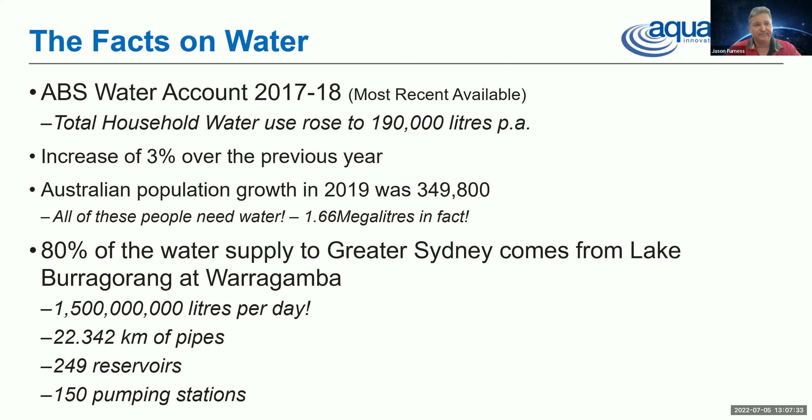So getting into it for the time frame, we've always got to look at how we can do more with less, and you're always looking to make innovation into your design work. Developers are looking for innovation to have something that makes the development stand out and, realistically, reduce the cost. I know a lot of us are struggling with the inflationary impact of building costs, causing designs to alter, projects to go on hold, or projects to frankly be cancelled because of the increases. So wherever we can have a solution that helps create some flexibility and reduces cost, that's great. Lifting the bar and all that is what we're all looking through.

They're people we deal with regularly in many cases using Aquacomb. It's a well-proven system. So I'm going to take you through rainwater and why you have to do things about it, some major technology options currently used, a bit about council's approaches, and key questions for you to look at and consider and ask the people you partner with in developing your designs.

And just one example of a very tricky site we're engaged in, where we've been rung up as an emergency to try and help rescue this project. Okay, Aquacomb — it's the graphic. Rain falls, look outside, you'll see it.

The rain is captured in the downpipes. It goes into tanks that are all interconnected, and they have the same footprint as your standard polystyrene waffle pod. That's where we capture it.

Now, whether you've got 1,000, 3,000, or 20,000 litres, depending on the size of the house, what's visible above the ground is the small pump station. I'll show you what that looks like a bit later on. But basically, you end up reusing your existing footprint.

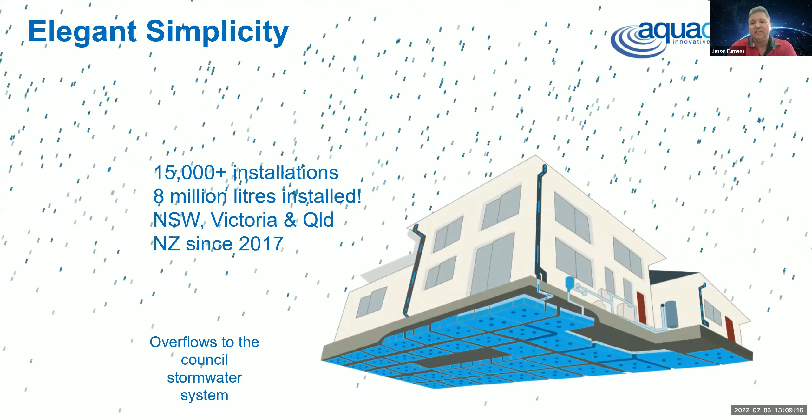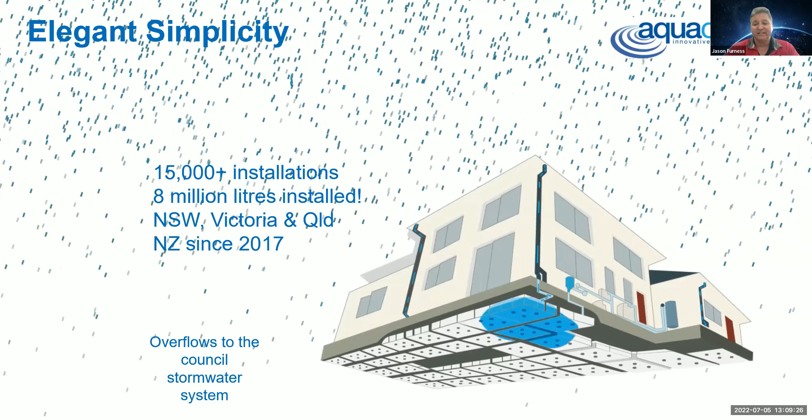So if you've got a very small site where land use ratio is an issue, it's a very good solution. If you've got a tricky site where access is a problem for an existing site, it's also a very good solution.

Okay, why do you have to do anything? All that pipe work I mentioned before has got to be maintained. Governments have a big infrastructure bill, they want to reduce that, and they're trying to take load off the system. That's what it's all about.

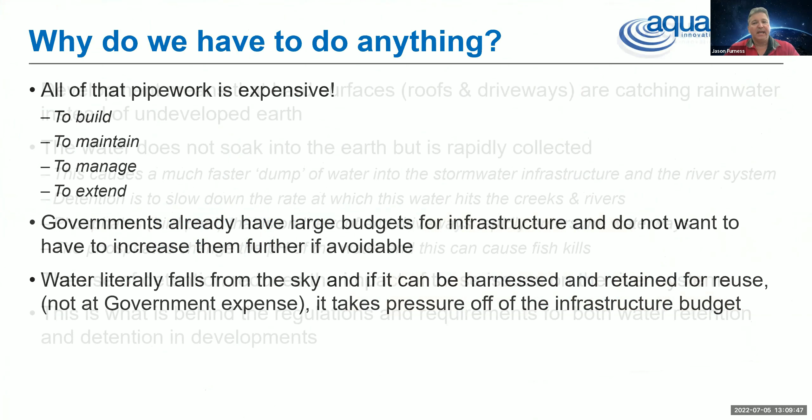As we increase the amount of development, hard surfaces, roofs and driveways catch water and it runs off faster instead of going into the ground. The water doesn't soak into the earth, it's caught, and it's got to go somewhere quickly. That's what most of you will be familiar with - detention basins around various subdivisions.

And increasingly, particularly if you're in a council area where there are waterways, the regulations they have are well above BASIX, and you can get your DA back with stricter requirements.

There's one we're looking at from Manly where there's a small block. It had been knocked down and rebuilt into duplexes. The DA came back, and that's great, but each duplex had to have 3,000 litres of retention. Okay, that's all right. But 15,000 litres of detention each - that's massive, and that project is not viable with underground solutions.

You're going to add 100 grand to the construction costs. That detention is there to take the load off the system for the shock of volume of water coming through, but also, frankly, the bird poo changing the chemical balance of the streams and estuaries. That's why there are regulations governing this.

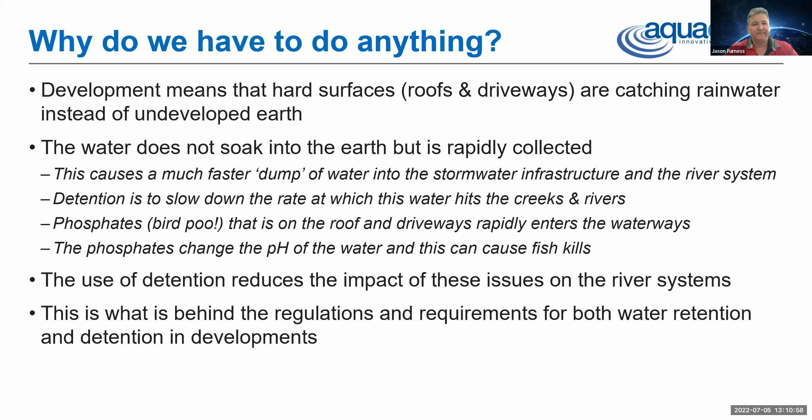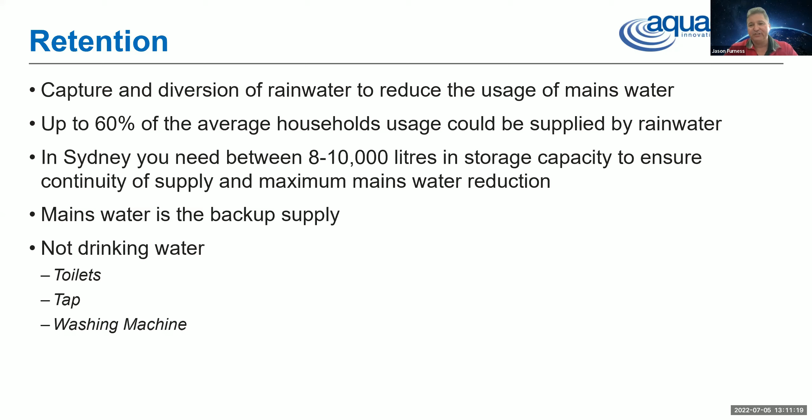Right, the main two water strategies: retention, capture and reuse. You need about 8 to 10,000 litres in Sydney to really guarantee your percentage, or to always have water around between dry periods. I know for those of us in that area that doesn't really seem too real to us right now, but it will come back. Toilets, taps, washing machine, and an external tap is what we can do with it.

Detention. This is taking the shock load off the estuaries, and it needs much larger volumes. The smallest one I've seen specified was 10,000 litres. Stormwater surge is captured and then drains away over a period of time.

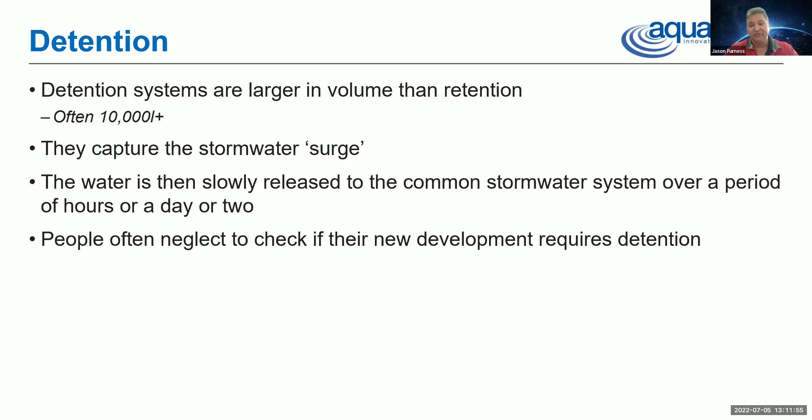This is a mistake I've seen people make - they don't go and check whether they have to put detention in. And when it comes back with the approved DA with conditions on there, we get a phone call saying, we don't want to dig a big hole for an underground tank, or we hadn't budgeted on this - what can we do?

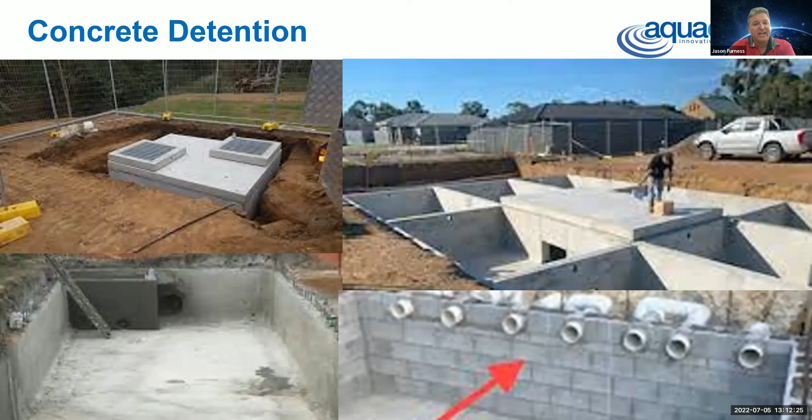Right, well-known and accepted technologies and what's going on with them. So concrete detention pits are really common - built on site, some precast and put in. It's expensive, you've got to dig a big hole, and you usually have to treat or compact the earth beneath it. If you build one like the bottom right-hand corner, you've then got to seal it. And they are unsightly and expensive, and block up site access during construction unless it's carefully coordinated. It's a well-proven technology - it works.

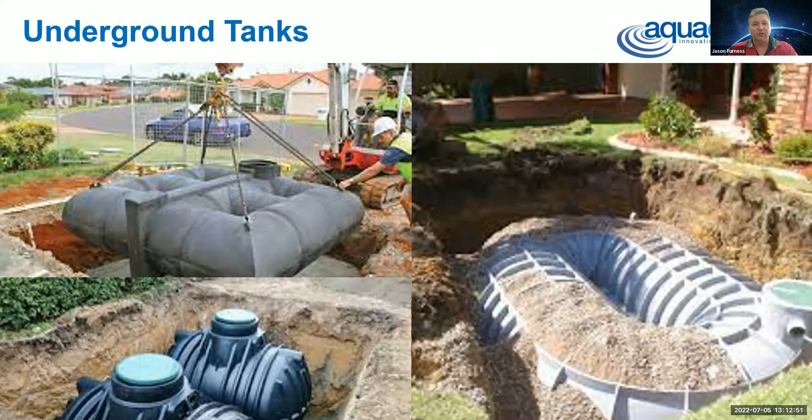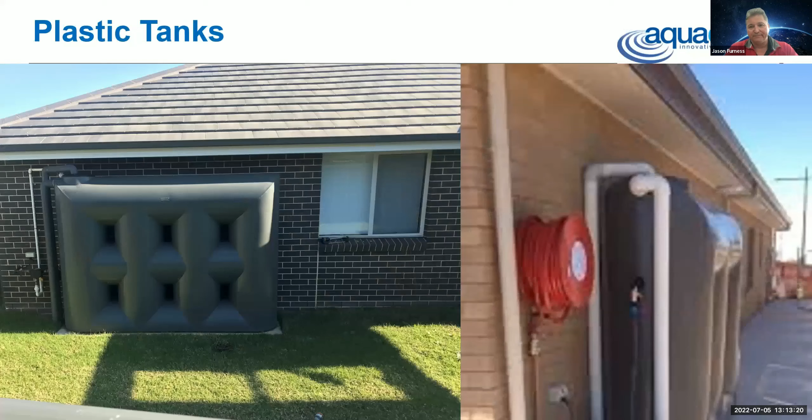Now, above ground tanks are only allowed in most areas for retention, and not allowed for detention. I think one of the reasons for that is that anyone can come through after the event, remove the above ground tank, and no one's the wiser. Then the council loses all its protection of its assets.

Now, we supply a range of above ground tanks. If anyone wants above ground tanks, that's fine - they are very functional. They're just very rarely allowed for detention from the councils we deal with a lot, and the engineers we work with.

For built-in ground tanks, you end up with a bigger area covered because you usually lose that space above it. It's not a lawn or a usable area. It can be part of a driveway or an access way amongst townhouses, but you end up with a big area being taken up. And plastic and metal above-ground tanks, you're losing the area for detention or retention.

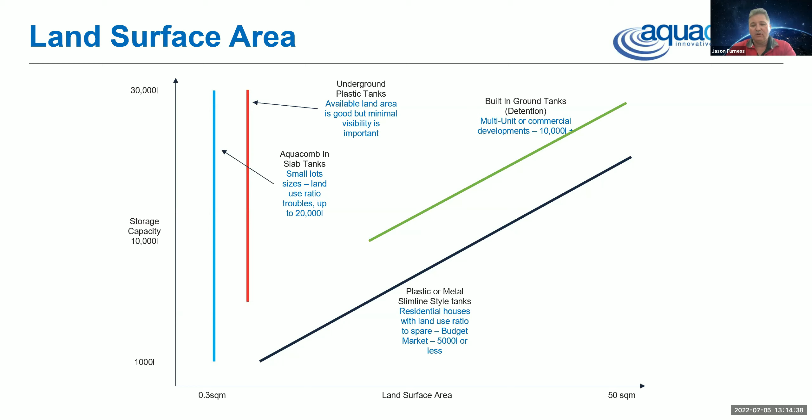Cost. If you're going to do a big underground tank, that's the most expensive relatively - this is all subject to change with prices of various commodities. The cheapest all the way is above-ground plastic tanks, but they're not always allowed for some solutions. Aquacomb is more expensive than other areas, but digging a big hole and all that excavation work and the time is very, very pricey.

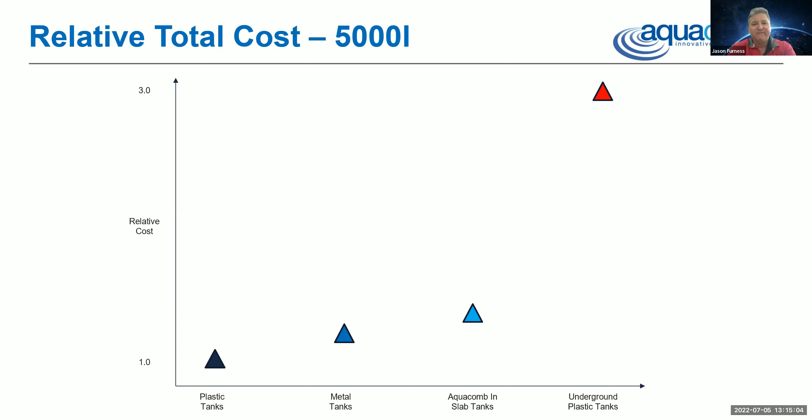That's a fairly common basic size for retention. It's 3 odd metres long, a bit over 2 metres high, and this one's about 1080, so a bit over a metre deep. If you've got a smaller or medium-sized block, it's taking up a lot of side access.

And the big thing is you may as well write off a window against the side of the house. You've got a home theatre, great, you don't want a window on that wall. If you put it in as an afterthought, you will block a window if you've got one there. You'll also block off your side access, but get some idea of the scale.

Now, if you're looking at a 5,000 litre underground tank - again I'm there for scale purposes - 3.5 metres by 3.5 metres. You've got to dig down about... the tank itself is about 800 deep, but you've usually got to go down about 1.2 or more to give you some ground coverage, and that's what I've got my hand on there, the outlet up to the hatch.

These are big items of kit that need to be planned in, and that tank weighs 400 kilos - there's a bit of effort involved in putting that in place. Aquacomb units, they're 13 or 15 kilos each, depending on the size, and you've got the pump box there.

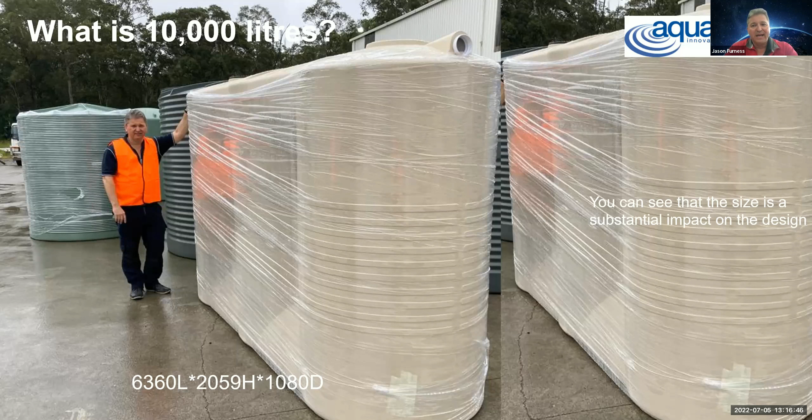Now skipping through, I know we're short of time - 10,000 litres, it's the magic of cut and paste. Again, you've got over 6 metres in length. If you have a large retention requirement, it becomes unviable - you start looking like an industrial chemical plant on the exterior if you've got to put those things on the side of your house.

So, questions to ask to avoid the problems we get. Every weekend we get responses to our ads about the keyword of detention saying, can you help us, we've got a detention problem. Go and ask first - look at your local DCP, LEPs, or whatever the various acronyms your council is using about the plan. It's easy to overlook that there will be a detention requirement.

We get plenty of builders, developers, and homeowners talking to us a couple of weeks out saying, I've got my DA, but this requirement on here we can't solve without boosting our cost up, what do we do, we'd like to start construction in 6 weeks' time. By the end of August we will have that pathway through councils all mapped out with our first few jobs going through - this is a relatively new venture, and we've got the right engineers involved helping us pick through, dot the I's, cross the T's.

It's all going to be there, and we've got a couple of councils in Sydney that are very cooperative for doing this. This is a problem you can avoid, the sticker shock and the tired and emotional response, because for all of us involved in designing and constructing, it's pretty hard to look the homeowner in the eye and say, oops, sorry, we didn't think of that one. You can go and have a look.

BASIX minimum, ask council what's the history about going above BASIX minimums for retention in particular. Some BASIX minimum will be 3,000, some will still specify 5 or more. Our experience is if the council's covering significant waterways or coastal areas, they seem to be the ones much more likely to increase those requirements above the BASIX minimum.

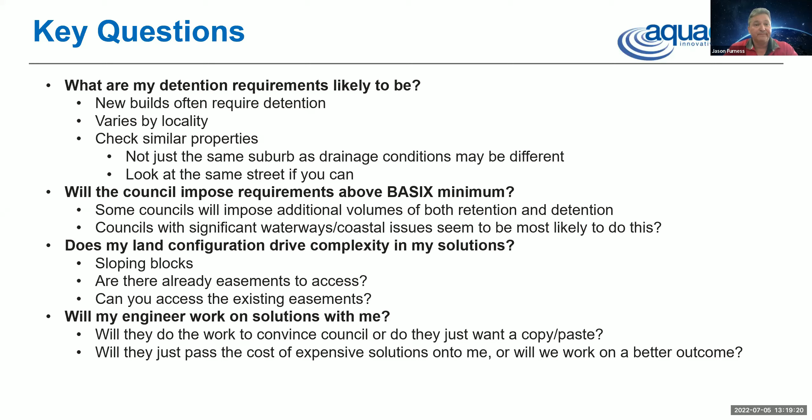Tricky site. This is a beautiful renovation extension happening on the northern beaches. Great example - we've got the DA, it's all beautifully done, the designs are there, I just copied and pasted a bit out of the architectural plans. However, they've got to put in about 25,000 litres of on-site detention, and the front part, the upper stories of that house, are already there. You cannot reach over the back to put a big tank in. They've got bad access all the way around, and the cost is going to - well, they haven't got access.

It doesn't matter what it's going to cost. You can't get a crane to get any asset over there, and you have to hand carry every brick if you're going to construct it all by hand. And they're being told they have to capture all the water from all roof surfaces, including the surrounds of the pool. They can attach to an easement at the base of that property.

This is one of those Hail Mary passes we had given our way. I'll have a look at the Q&A in a minute - I can't deal with that right now, I can't look at it and see what I'm talking about.

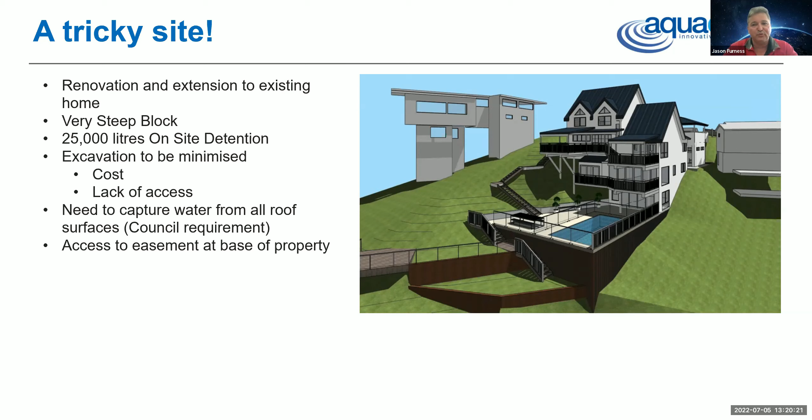All right, so we've got a very complex system here with aquacomb pods all interconnecting from the high areas to the low, but it's all very simple, it's just a lot of it. Go back - now, we can solve all of that.

We can deal with the access, we can comply with all the requirements. All we need to do is cooperate with the council and the hydraulic engineers to show that we attach to the easements, we've looked at all the alternatives, and we're there. And then this very prestigious looking and rather expensive renovation can go ahead. If we can't help them with the solution, then that homeowner's wasted a stack of money on something that could have been flushed out before we began.

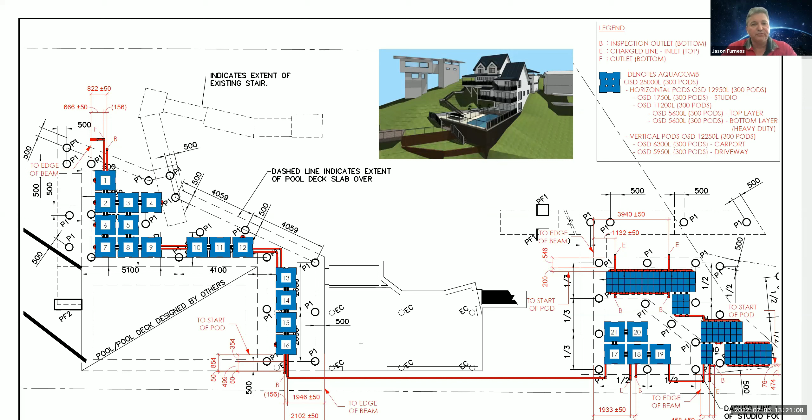I know we're short of time, it's only a 15-minute activity, so I'll just go through that and have a quick look at the Q&A, see if I can answer anything there.

Okay, try to use your system - a stormwater engineer was completely against it, the reason was cost and maintenance, he convinced the clients not to use it. Find a different stormwater engineer, there's plenty to do with it. We've got 15,000 of these things in here, used by other builders. We have a way of cleaning the system, and it is more expensive than a standard above ground tank. Not every engineer - I am an engineer myself, so I can pay out on my own profession - but not every engineer agrees with everything, and we're approved and utilised quite widely.

Okay, the question about energy efficiency - we do get asked about this a little bit, and there's nothing that we have that allows us to model any impact on the thermal performance of the slab or the thermal performance of the activity there.

There isn't work that we've done around that. We don't have problems with people saying there's cold floors. I'm certain in a thermodynamic sense it does have some impact when the tanks are full. We think what's going to happen is the water temperature will equalise with the ground temperature, which is quite low, but we don't have the modelling around any of that.

Concrete underground tanks are generally much, much more expensive - I think at a factor of 3 in the graph I prepared for a presentation to a building designers group. As for lifespan, we warrant the Aquacomb tanks for the life of the slab. So unless your slab's cracked and falling apart, the tanks are going to be fine. They are very well protected.

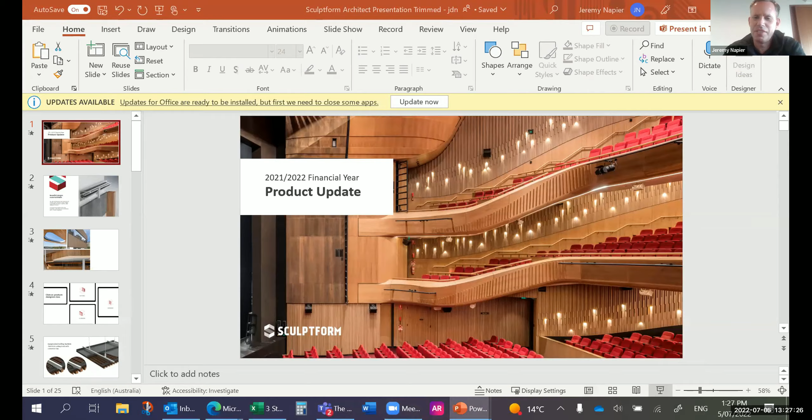I'll hand over to you. You just need to change that into presentation mode, because we can see the thumbnails down the side. Sorry about that. I don't do this very often. All good, thank you, that's it.

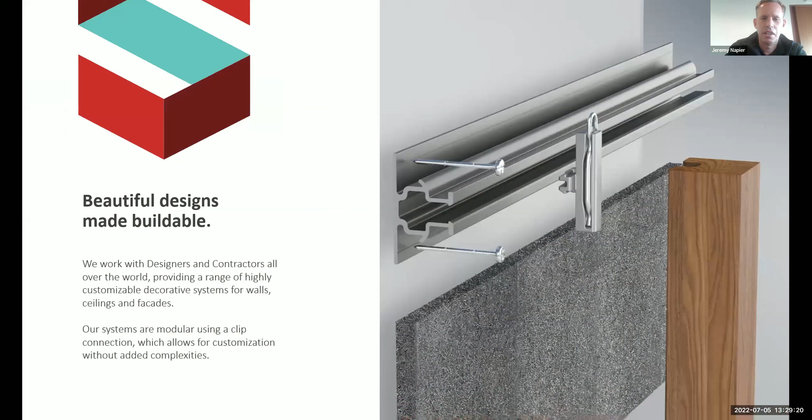So what makes us who we are? It's really the connection. We are strong believers in modular, and in Lego, and the idea that with one Lego block you can create anything really. It's about the fact that you can achieve something that is pretty much custom or bespoke, but it's made out of standard elements that are modular and can be configured in any number of different ways.

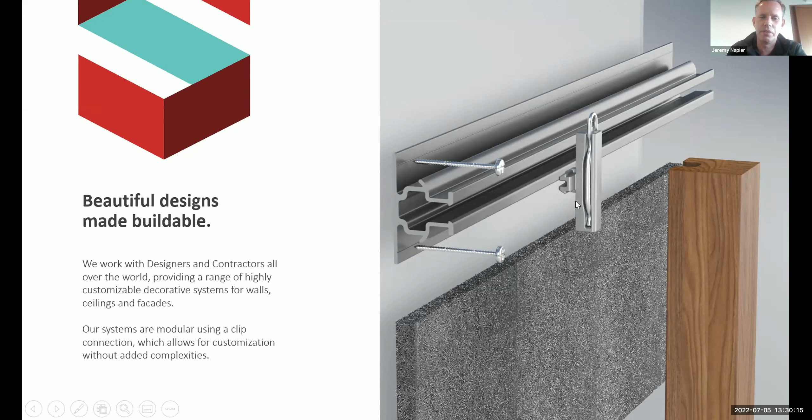The genius of our product is really in the clip, or in that connection. It is literally a click-on button onto the track. The tracks come with these fixing clips pre-mounted at the fixing centers, or the pitch that you specify. Then you get packs of tracks and you get the battens, the pre-finished battens, and you just screw up the tracks and you click on the battens.

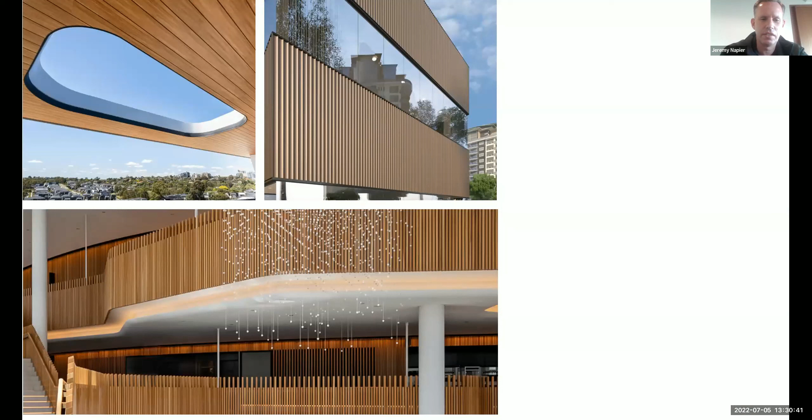That is our sort of main product, our click-on battens product. And you can see further than that, we are going into other products which are based on the same platform.

So we have a click-on cladding system on these two top images. Top left one was a Mirvac project, a great big feature on a multi-unit residential project. And the right-hand one is obviously an external facade with a fluted profile.

We've also started a clip system which can be used for balustrades, balustrade infills, which many would know is a really tough application engineering-wise.

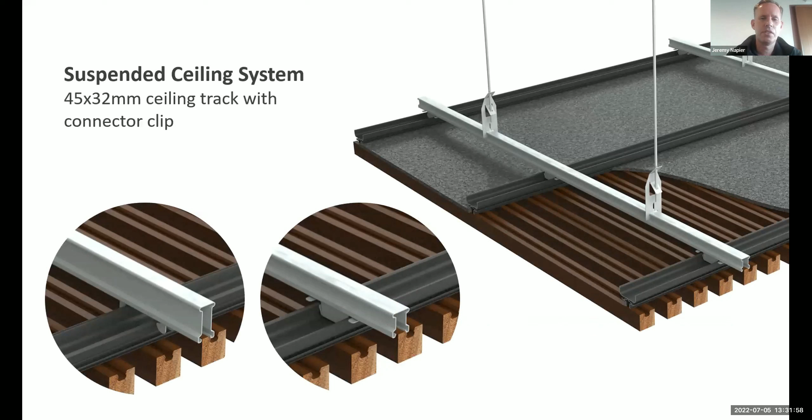In terms of just going to ceilings, a lot of what we do is interior ceilings, which obviously are for feature applications, but then also where there are acoustic requirements. Our product does perform excellently acoustically, being used in convention centres, theatres, performing arts centres, and all that sort of thing.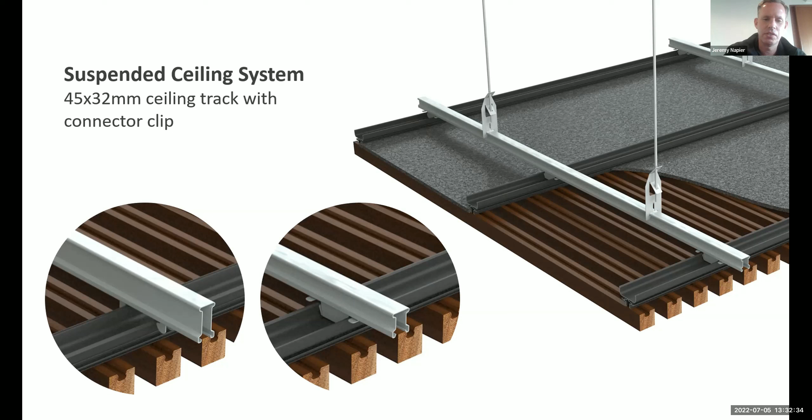You can see here how it neatly configures and connects with a Studco type suspended ceiling connection system, which all ceiling and wall contractors are familiar with. The excellent part about our product is that it effectively gives you a joinery finish, or a joinery look, very high-end, but can actually be installed by a plasterer, just a conventional plasterer.

With our click on batten products, you can see there's quite a range of profiles available. They can be configured in any number of different ways, and you can see on our website all the different looks that architects have achieved with it.

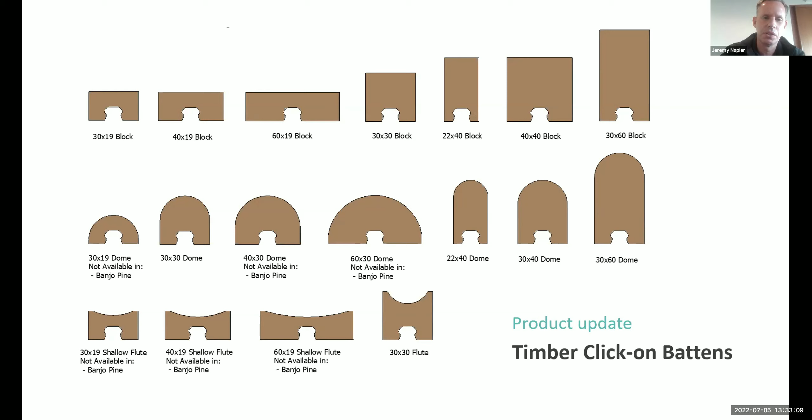Here is another look at that click on screen product, where you've also got a batten look, but it's applied to balustrades in this case, which get crowd loading. So the actual connection has got to withstand an enormous force.

So we work along with engineers to achieve performance solutions on a project by project basis. You can see the difference between the click on screens product and the click on battens product. The click on battens product typically gets an acoustic panel behind it, it performs acoustically, and it's typically a one-way product. Whereas the click on screens product is just aesthetically pleasing from all sides, so it provides an open look.

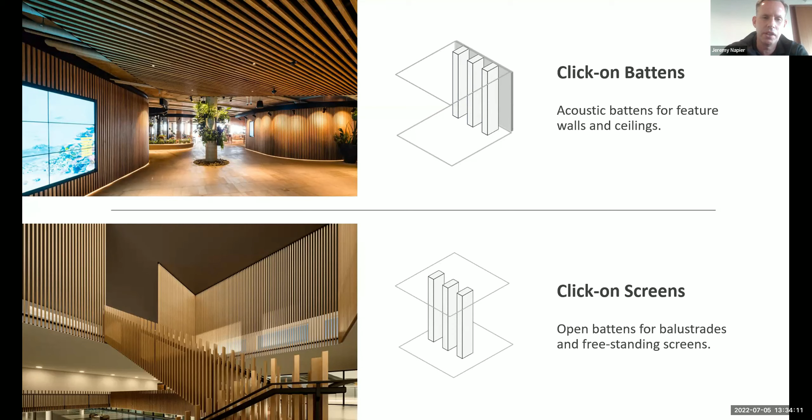They obviously work well together. The click on screens product was actually launched just this year, so it's quite a new product. It is very exciting. We actually launched it because there were applications that our click on battens product was being asked for, but engineering wise it just couldn't achieve it.

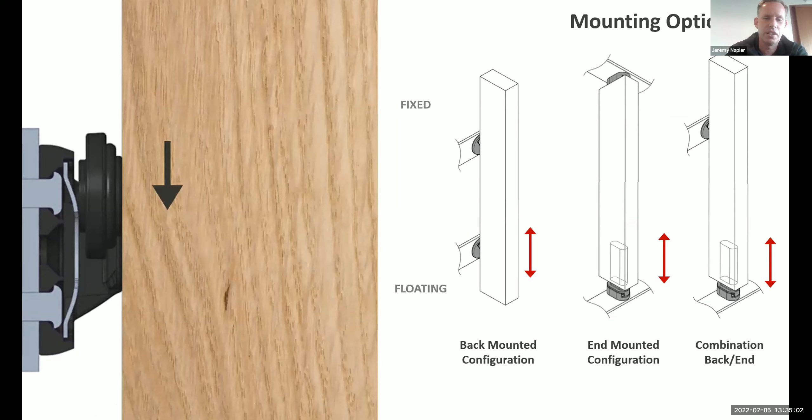You can see the way that this click on screens clip works. We'll have another one here which shows you the way it actually just clicks in. One thing about our product and our company is we're all about the click, so every connection we provide is a simple click-in type system, and there's a number of configurations, as you can see.

And it's pre-mounted for a balustrade, pre-mounted to a rail system, as you can see there, which can be packed out or has in and out adjustment to allow for site tolerances, and is very easy to install.

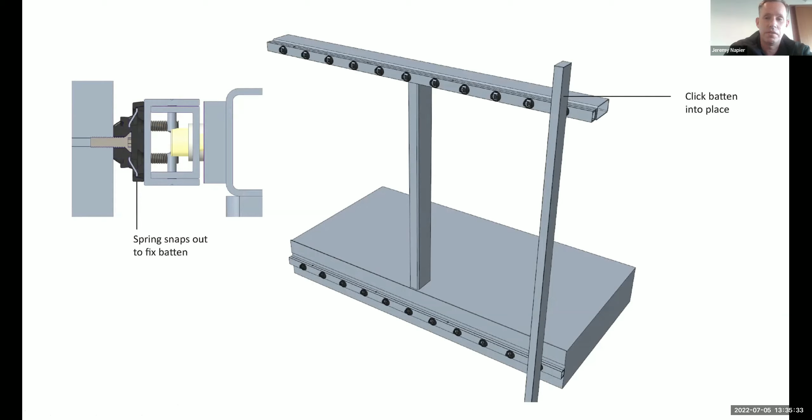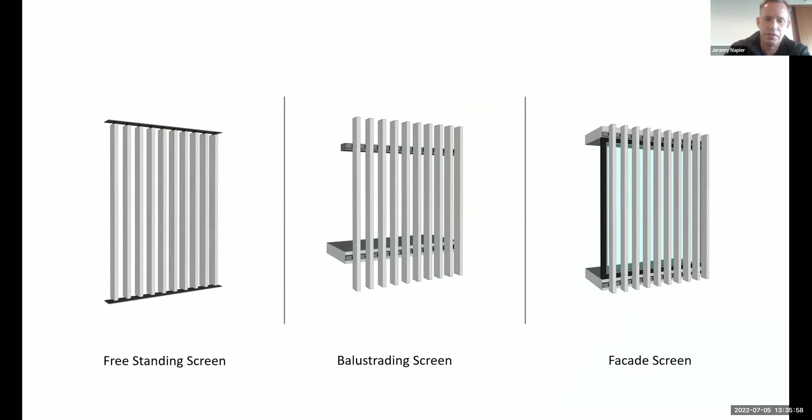And those are the different applications that product can be used on. It's pretty broad, right from an office fit-out type project, the way offices are being used these days post-COVID, right to balustrades, as you saw before, and right to an exterior facade screen over glazing. There's quite a wide range of profiles, both in solid timber and aluminium.

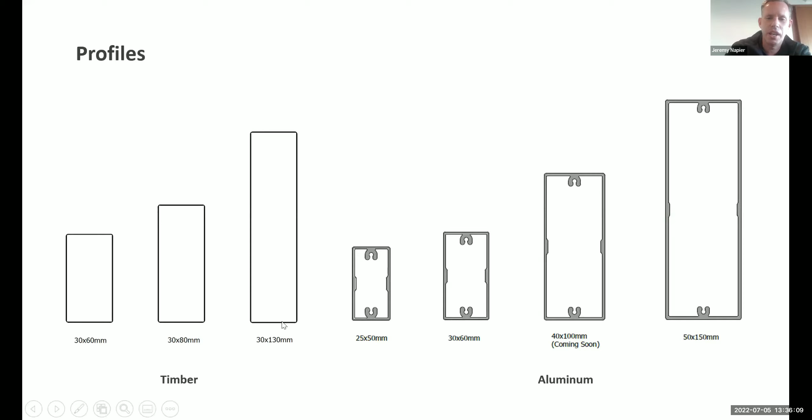Our click-on cladding product is also relatively new, and it's very exciting in that it comes as both powder-coated, anodized, or we actually do a wood wrap onto it. Unlike sublimated powder-coated wood grain finishes, this is actually a printed sheet onto polyolefin, a product we import from Japan, and we do the wrapping onto the aluminium profiles ourselves.

It's called the profile wrapping process. The great thing about it is that it's a much more realistic, even textured finish than the sublimated powder-coated wood grain type finishes. Not only that, but it actually has far superior UV resistance and fade resistance because of its manufacturing process.

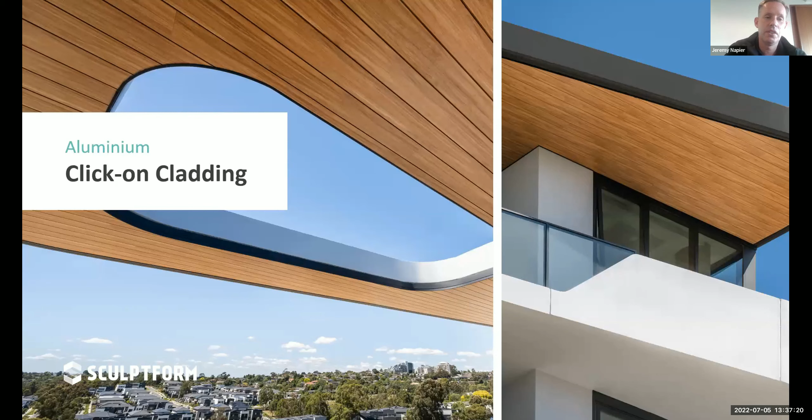So it's a very popular product. That finish there is actually a blackbutt look. The good thing about our click-on cladding is it shares the same platform as our very well-known click-on battens platform, so it's also clipped onto a track.

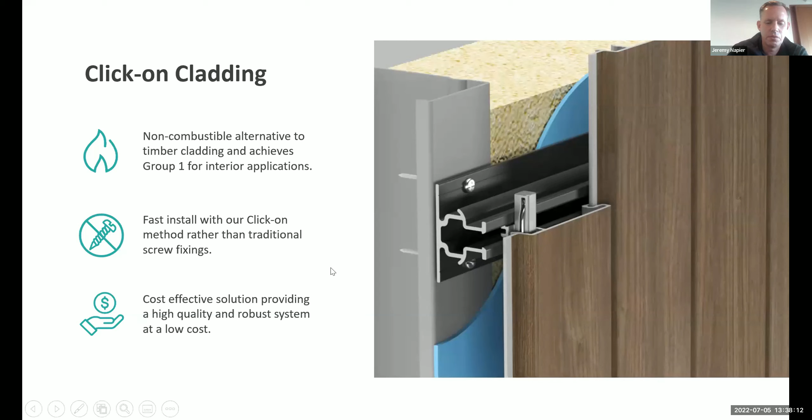Tracks are screwed up, and then it uses the tongue and groove type concept, and literally each board just clicks in. It's very fast to install, allows for thermal movement, and is obviously easy to do. It's fully non-combustible because it's an aluminium extrusion product, for Group 1 interior applications as well as Class 1 for exterior. There's obviously no fixings, and it's cost effective.

As you can see there, I'll just play a little video here showing the install process. See, it doesn't get a lot quicker than that.

And we have a whole range of trims, which are very finely detailed to provide a high level of finish. Just showing here the wide range of profiles, we go right up to 300 wide, and we've got fluted profiles.

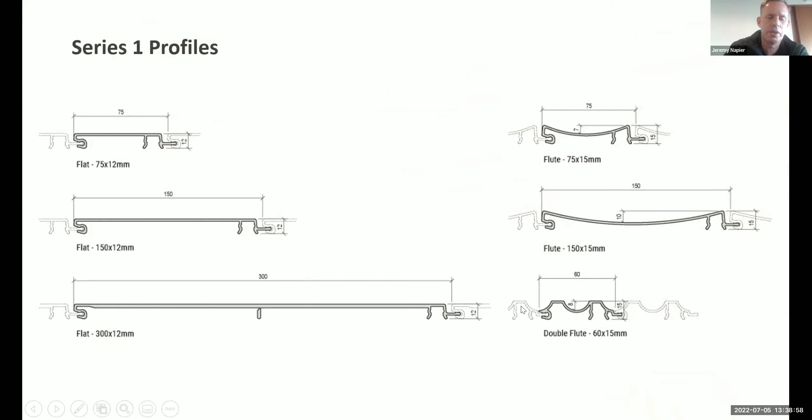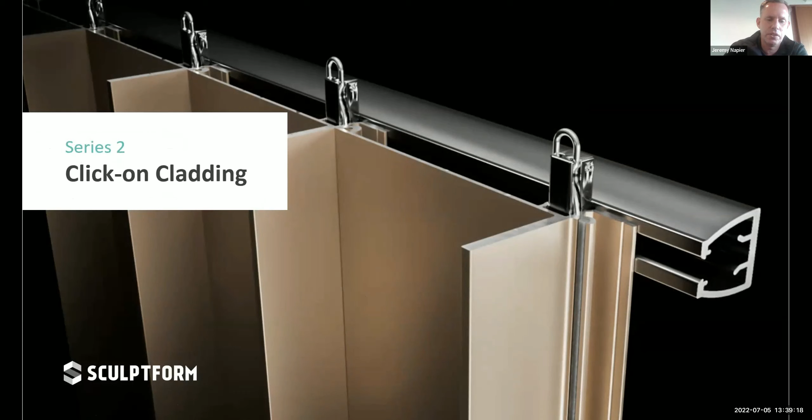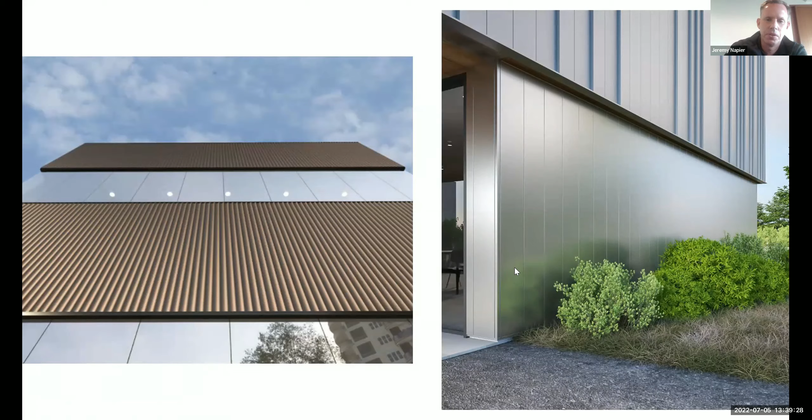And then our Series 2 range provides an alternative to the zinc type finishes, the more high level finishes that are used in higher end applications, and are generally architecturally specified. You can see here we've got quite a range, including a wide flute, a wide panel look, and they can be used in conjunction with each other.

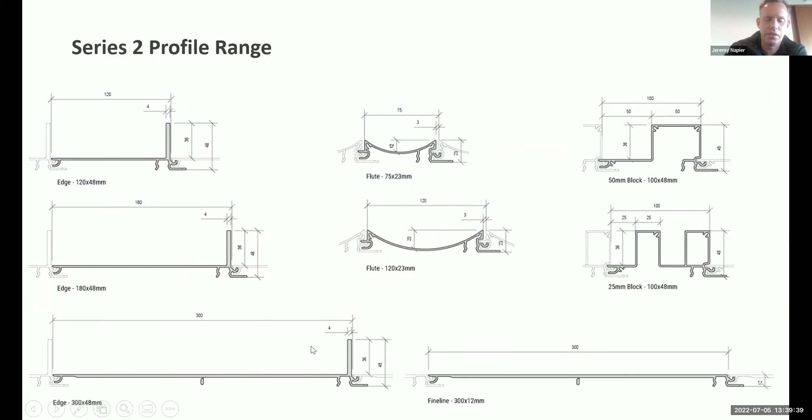So you can actually join up different combinations of these sizes to create a random effect. Just a few features of it there.

A rain screen type cladding system is a very durable type of system because it's basically a belt and braces type approach. So the final vapor barrier is at the back, so you use a pro clima type system. It also provides for good thermal efficiency, and it's fully breathable.

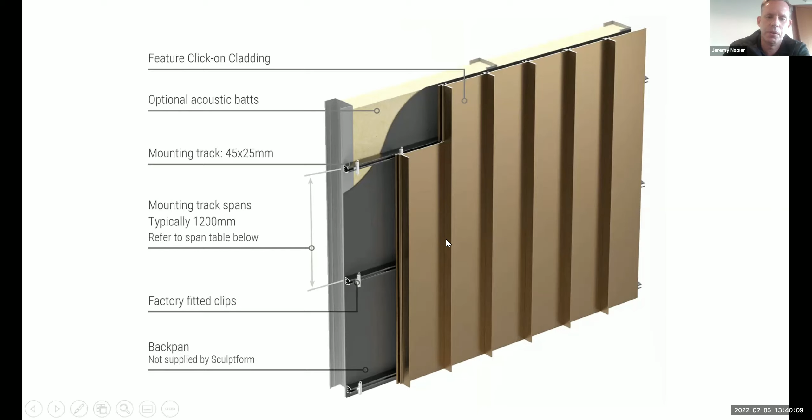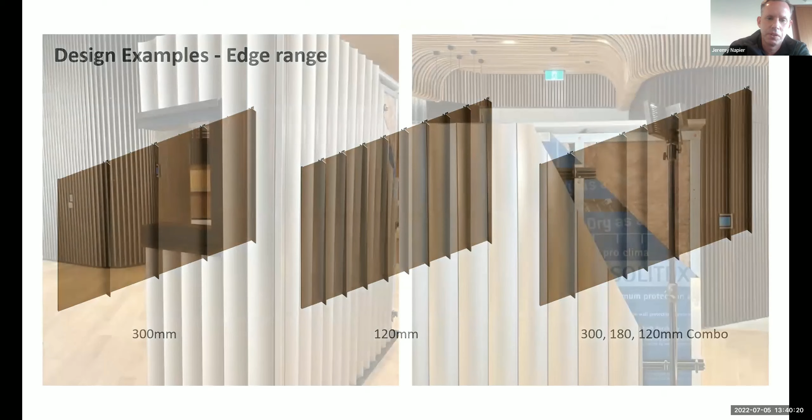A few other design examples with that product, and a mock-up that we did showing that flute there is a 120 by 23. It's inside of our studio in Melbourne, and it follows the golden ratio, which many might be familiar with. You can actually see the pro clima vapor barrier behind it.

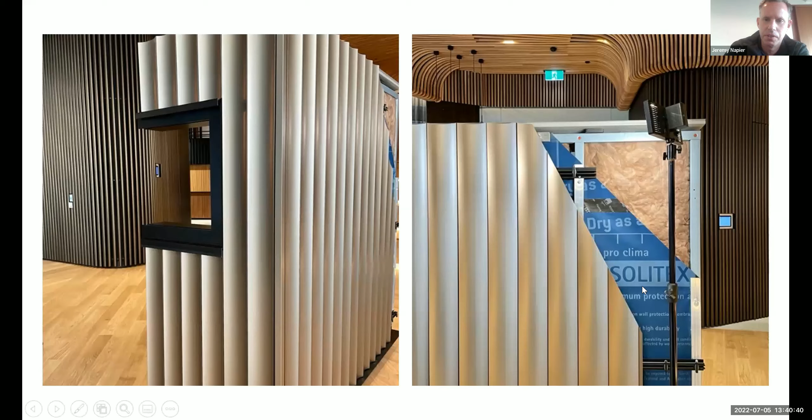And so, yeah, that's a little bit about us. This project that we're showing here is actually a combination of flute sizes with the wood wrap onto it, going into the entrance lobby of the building. And then there you can see our battens product beyond on the ceiling, as well as our solid timber paneling behind that. So we are traditionally a solid timber manufacturer that has gone into aluminium over time because of the fire requirements, but we really enjoy the flexibility of aluminium.